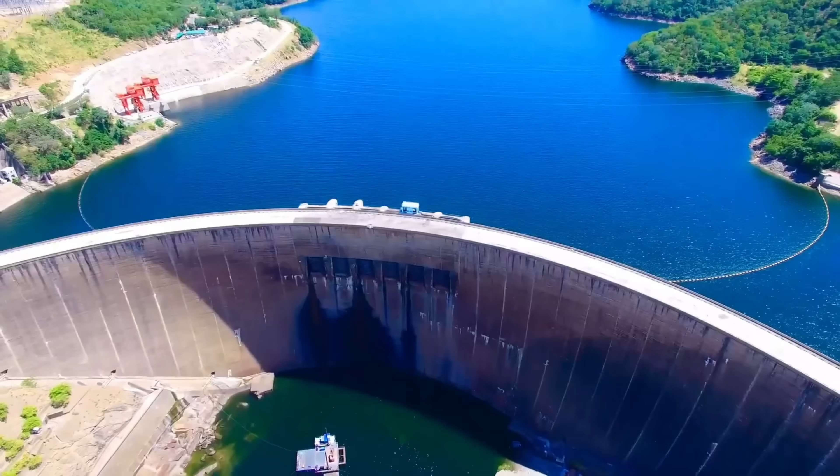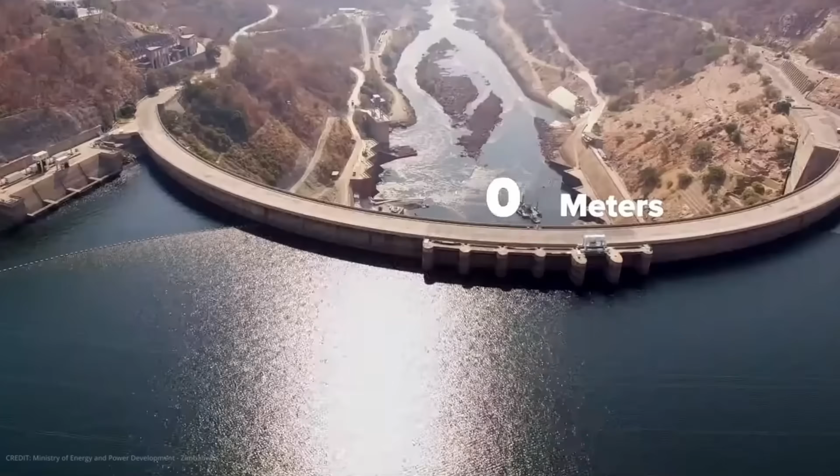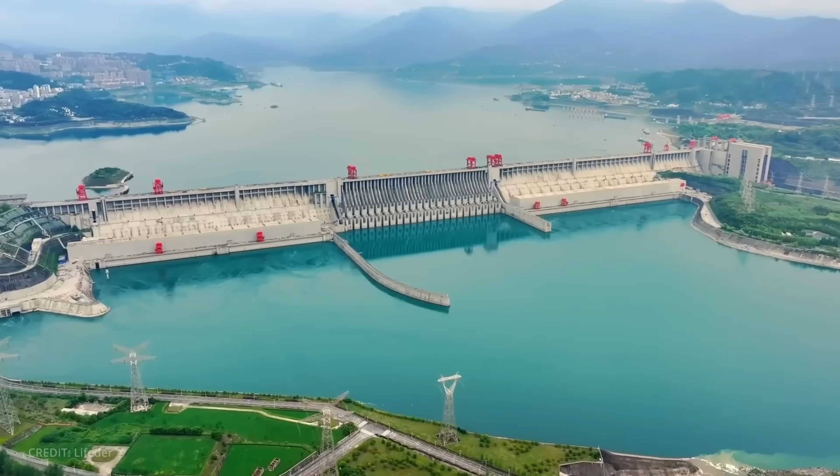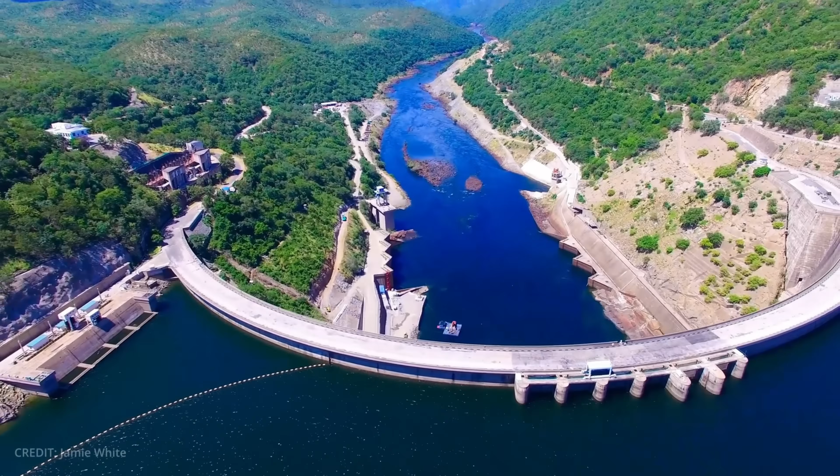For nearly 70 years, this dam has stood strong, generating electricity for 2 entire countries and powering millions of homes and industries across southern Africa. But there's a problem. Beneath the surface, concrete is cracking, foundations are eroding, and the spillway gates are literally breaking apart from the inside due to a chemical reaction destroying the structure.

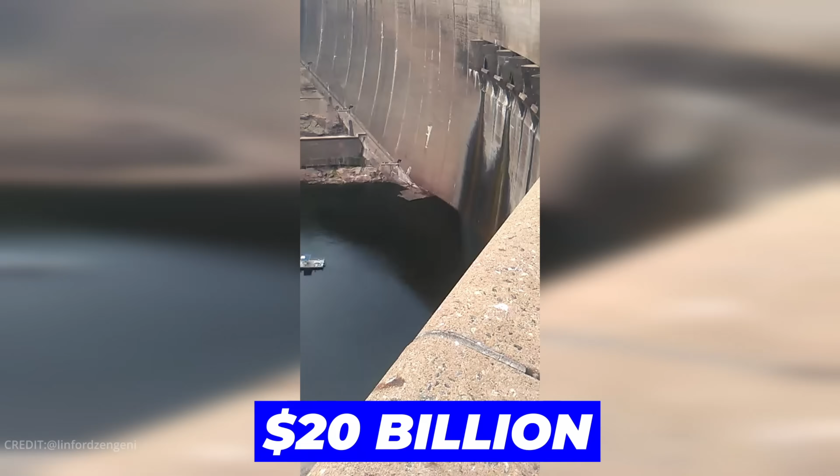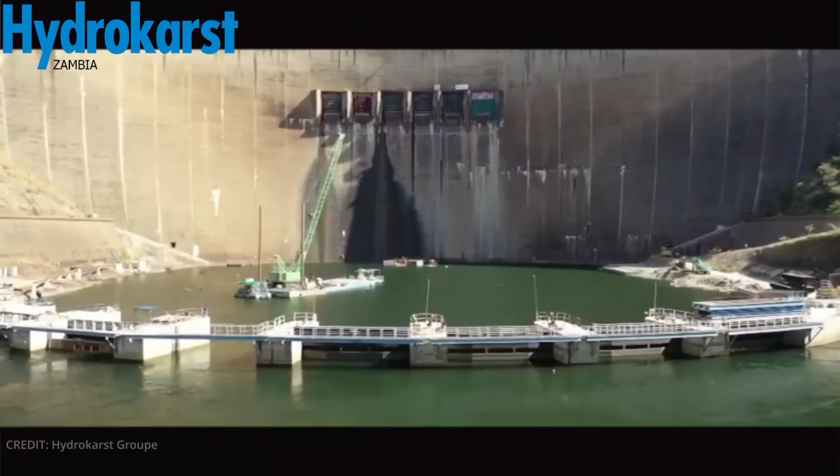Engineers warned that if this dam fails catastrophically, 3.5 million people living downstream would be in mortal danger, with economic losses exceeding $20 billion. That's why teams are now racing against time on a $294 million international rescue mission to save this aging giant. But they're facing not one crisis, but 2. This is the story of the world's largest reservoir and the desperate race to prevent a disaster that could reshape southern Africa. The clock is ticking.

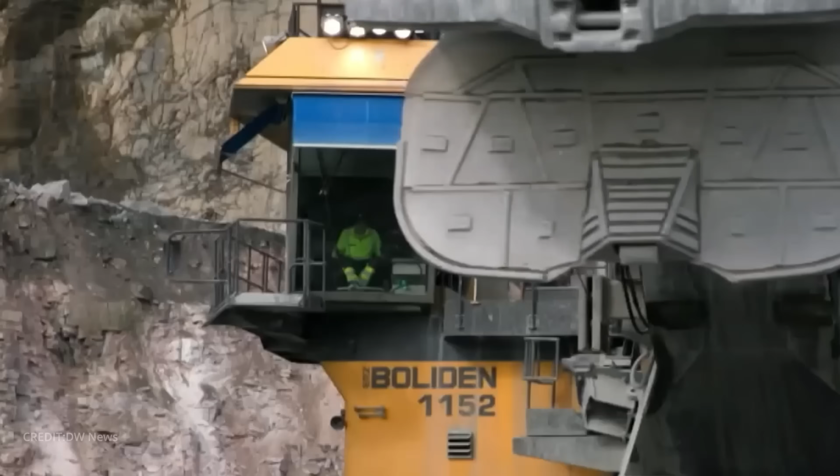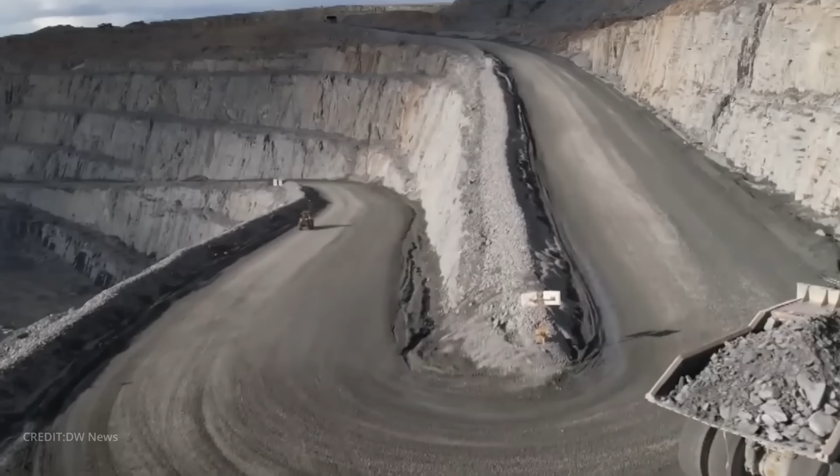To understand why this dam is so critical today, we need to go back to the 1950s. Back then, this region wasn't Zambia and Zimbabwe, it was northern and southern Rhodesia, British colonies experiencing something remarkable: a mining boom. Copper, coal, chrome. They were being pulled from the ground at an unprecedented rate, and the mining industry needed one thing above all else to keep the boom going: electricity. Lots of it. There was just one problem. There wasn't nearly enough power to meet demand.

So the colonial government made a bold decision: dam the Zambezi River at Kariba Gorge, the narrowest point along the entire river, with massive basalt rock walls on either side. The geology was perfect. An arch dam could curve into those canyon walls, using them to absorb the enormous pressure of the water behind it, rather than relying solely on the dam's own weight. It was an elegant solution.

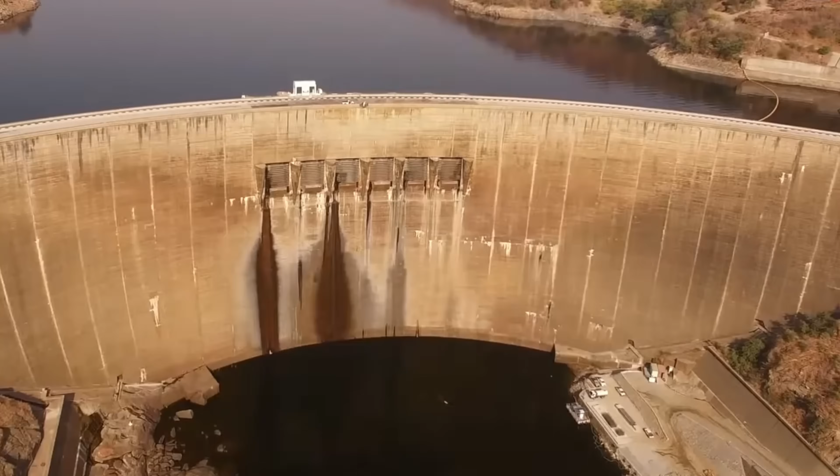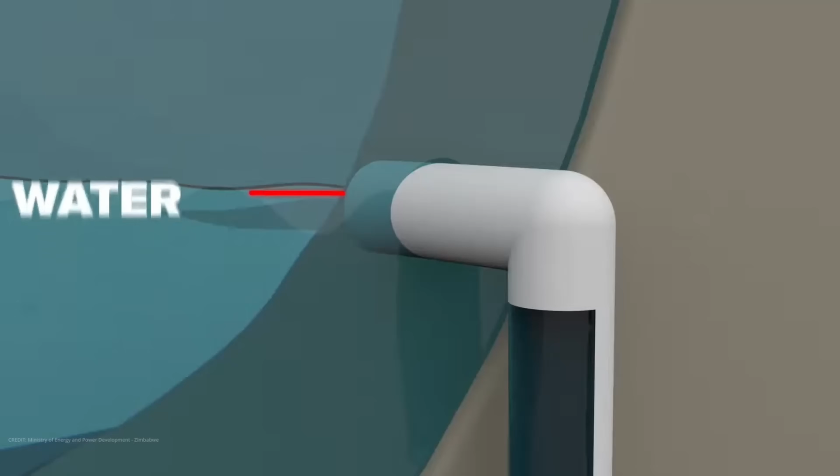But here's the thing. They didn't just want a dam. They wanted the biggest reservoir the world had ever seen. Why go so massive? Because a giant reservoir meant guaranteed power for decades, even during droughts. With 185 cubic kilometers of water behind it, this dam could generate electricity year-round, no matter what. It was insurance, a long-term bet on industrial growth. And that bet was about to require one of the most challenging construction projects Africa had ever seen.

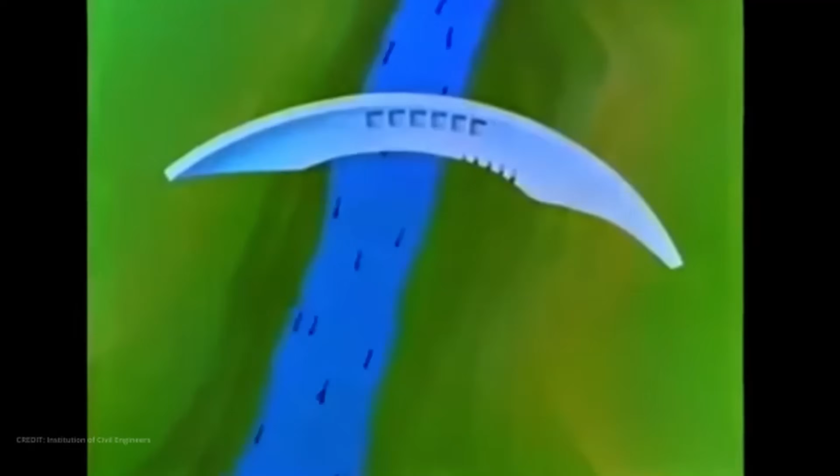Construction began in November 1955. The challenge? Build one of the world's largest dams in one of Africa's most remote locations and do it in just 4 years. The engineering team chose a double curvature concrete arch dam. At 128 meters high and 579 meters long, the structure would curve both horizontally and vertically, transferring the enormous pressure of 185 cubic kilometers of water into the canyon's solid basalt walls, rather than relying on sheer mass alone.

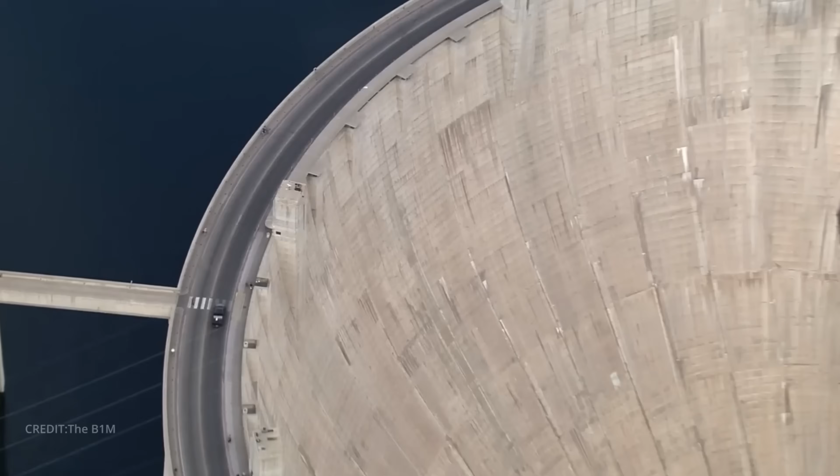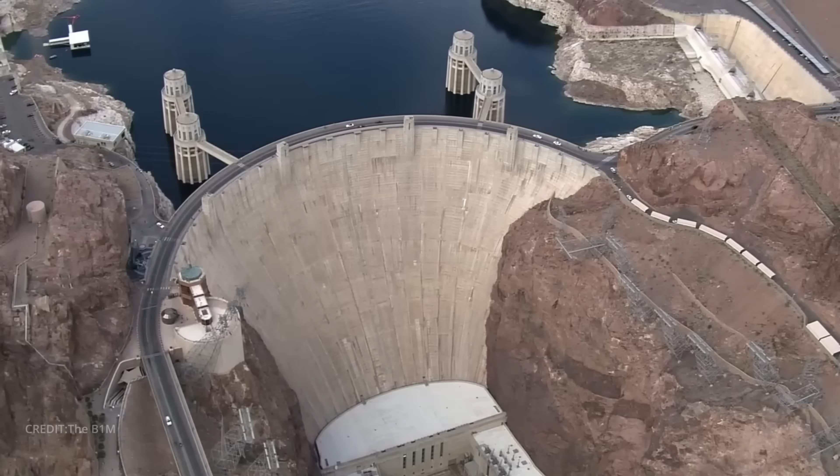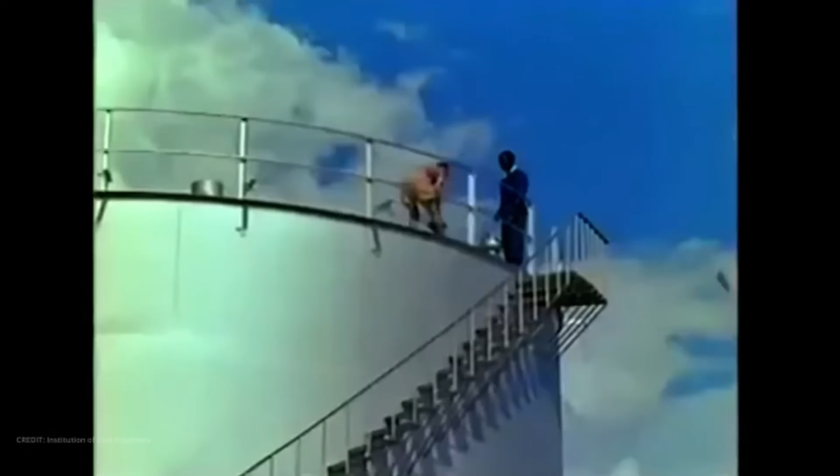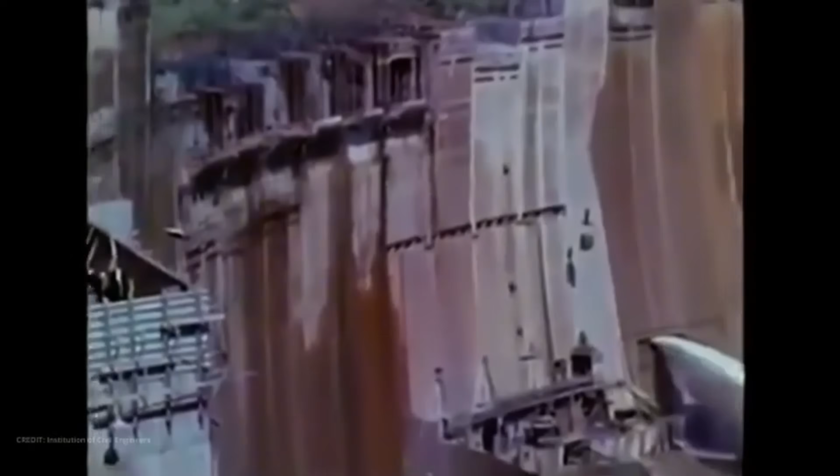The scale of the Kariba project was staggering. Roads had to be carved through rugged terrain to reach both riverbanks. An airstrip was built from scratch, essential for emergency medical evacuations and rapid transport of critical supplies, since the nearest railway was 480 kilometers away. 2 entire construction towns were erected just to house the 7,000-person workforce.

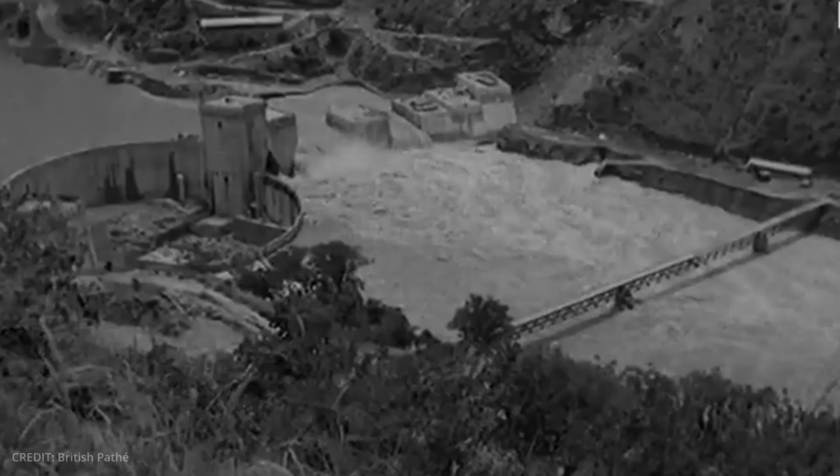But the local Tonga people believed there was another problem engineers hadn't considered. According to legend, Nyaminyami, a great river god believed to live in the rocks at the gorge, would never allow the dam to be built. In 1957, they were right, but not for the reasons they believed. The Zambezi unleashed what would later be called a 1,000-year flood, the highest flow ever recorded. Water poured over the top of the cofferdam protecting the construction area.

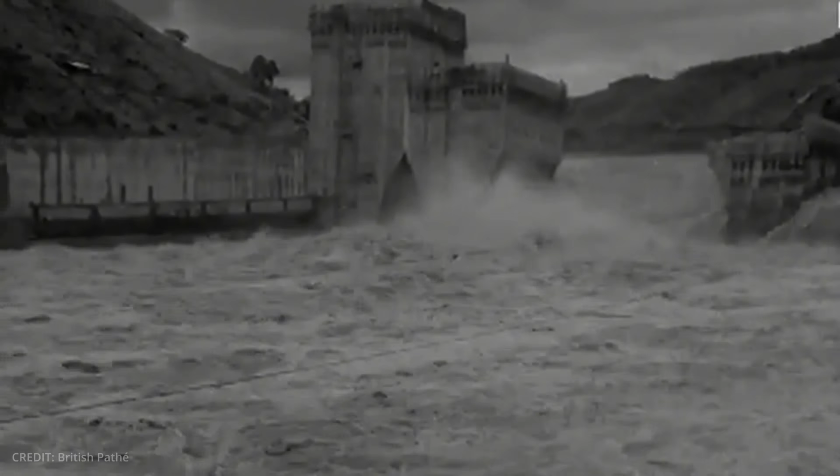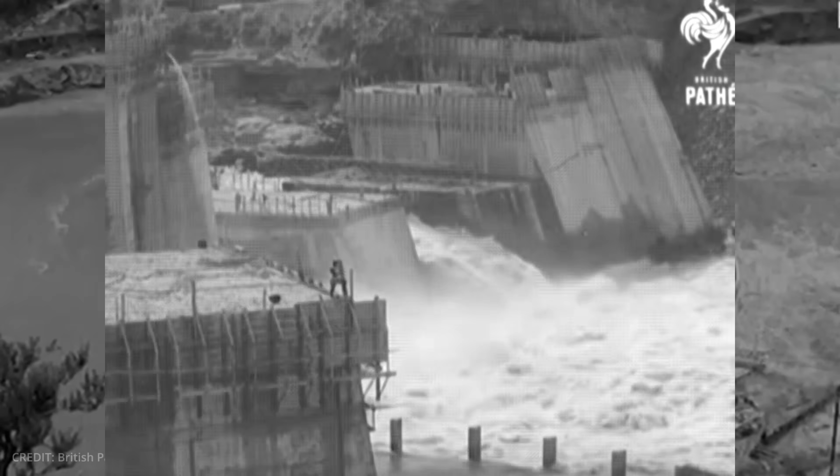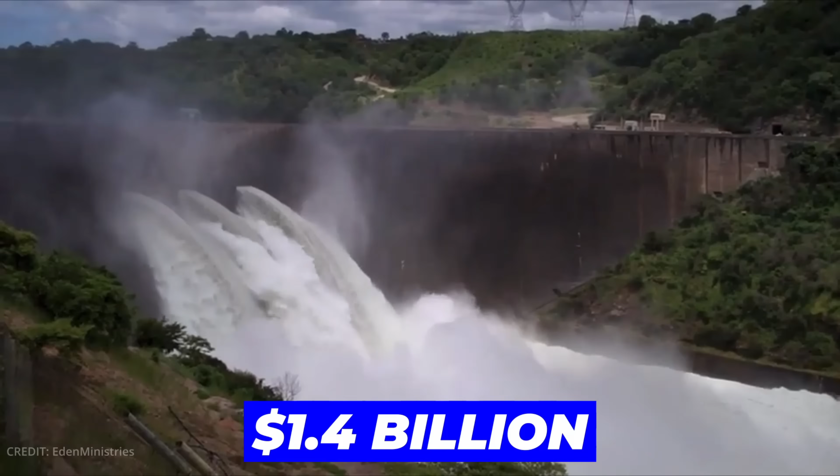By the time the dam was completed in 1959, 86 workers had died on site. Over 1 million cubic meters of concrete had been poured. The cost? $135 million in 1950s money, roughly $1.4 billion in today's dollars. There was another cost, too.

To create Lake Kariba, approximately 57,000 Tonga people had to be relocated from the Gwembe Valley, their villages and farmland disappearing beneath the rising water. Meanwhile, Operation Noah rescued about 6,000 wild animals between 1958 and 1963, a rescue that made international headlines while the human displacement went largely unnoticed.

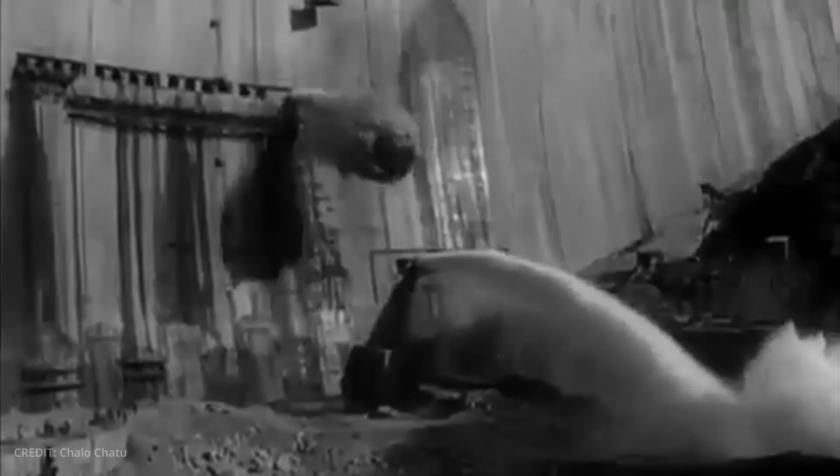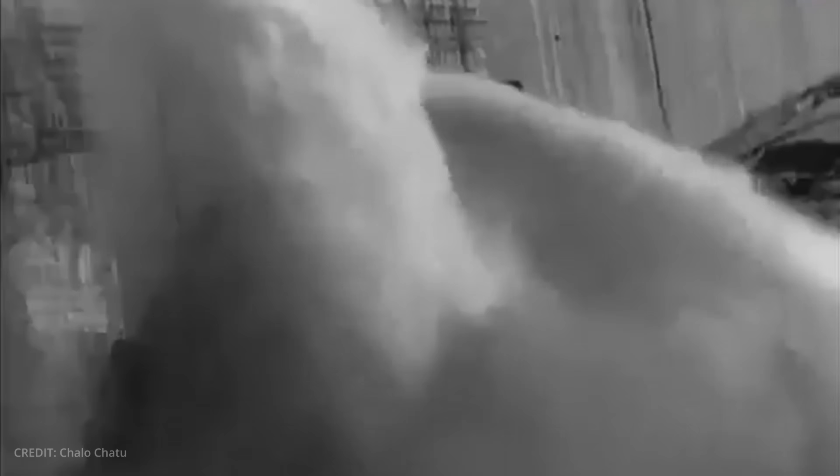When Queen Elizabeth, the Queen Mother, officially opened the dam on May 17, 1960, the structure was complete. Lake Kariba stretched 280 kilometers with a surface area of 5,580 square kilometers, making it one of the largest artificial lakes ever created. It was a triumph of mid-century engineering, a concrete arc holding back an inland sea. And for the next 6 decades, it did exactly what it was designed to do.

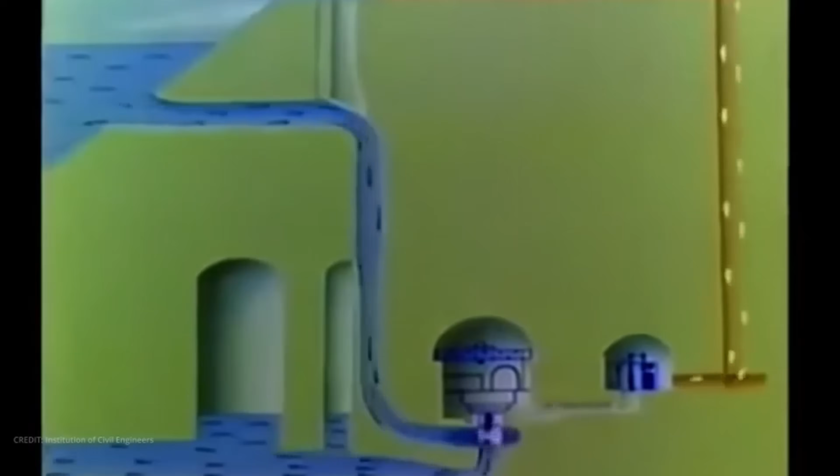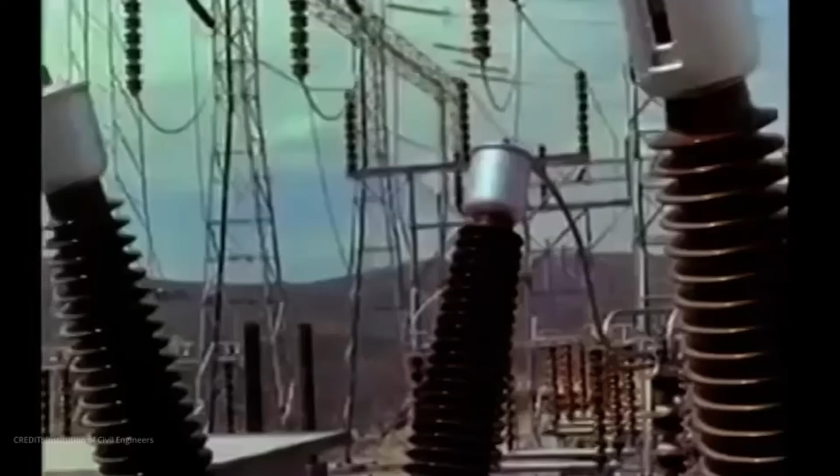The Kariba Dam generates an impressive 2,130 megawatts of electricity capacity. The power is split between 2 underground powerhouses. The North Bank station supplies around 1,080 megawatts to Zambia's copper mines and industries. The South Bank station supplies roughly 1,050 megawatts to Zimbabwe's manufacturing and agricultural sectors. These two nations have managed this shared resource without major conflict for over 60 years.

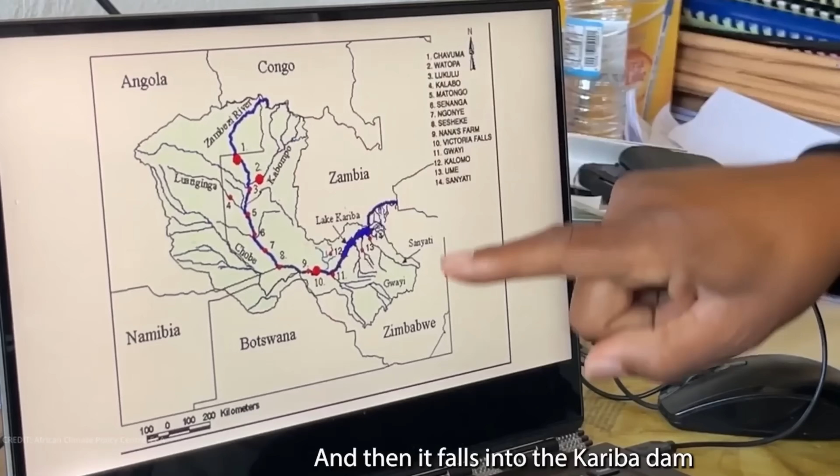The Zambezi River Authority, established in the 1960s, coordinates operations between Zambia and Zimbabwe. It's one of Africa's rare success stories in transboundary water management. At full capacity, Kariba generates over 10,000 gigawatt-hours of electricity annually, clean, renewable power that drives the entire regional economy.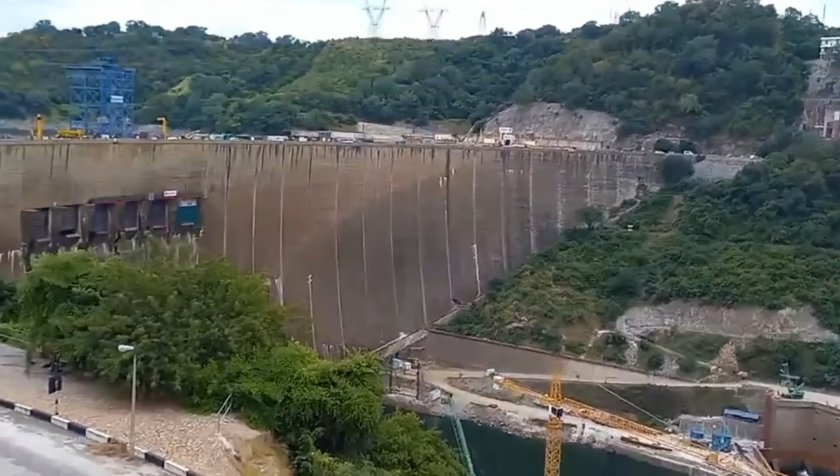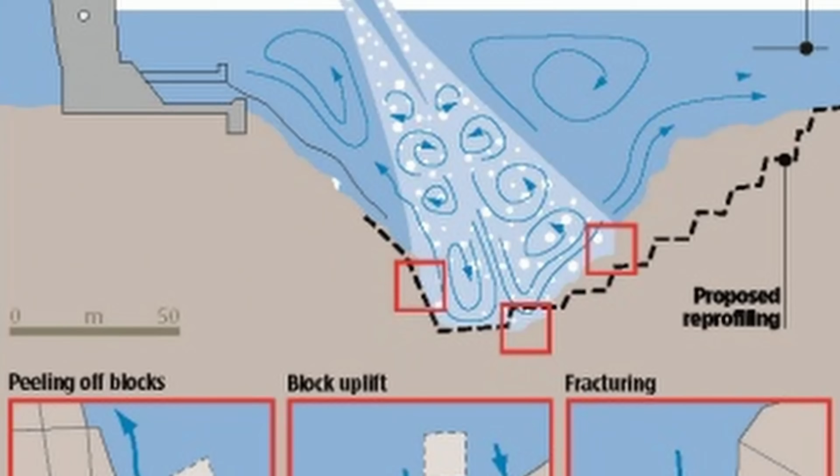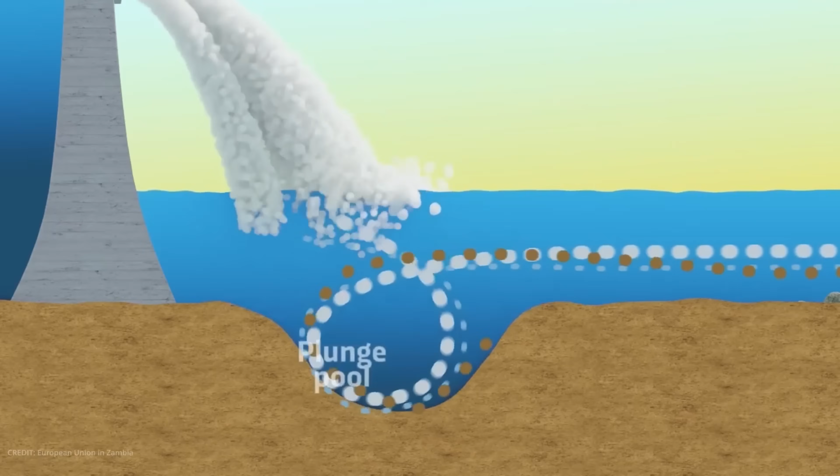But the dam's stability depends on 2 critical factors. First, the canyon walls and rock foundation must remain intact. Second, the spillway gates must function properly to release excess water during floods. Over the past 60 years, water cascading from the sluice gates at tremendous force has gradually eroded the bedrock at the base of the dam, carving out an 80-meter deep plunge pool.

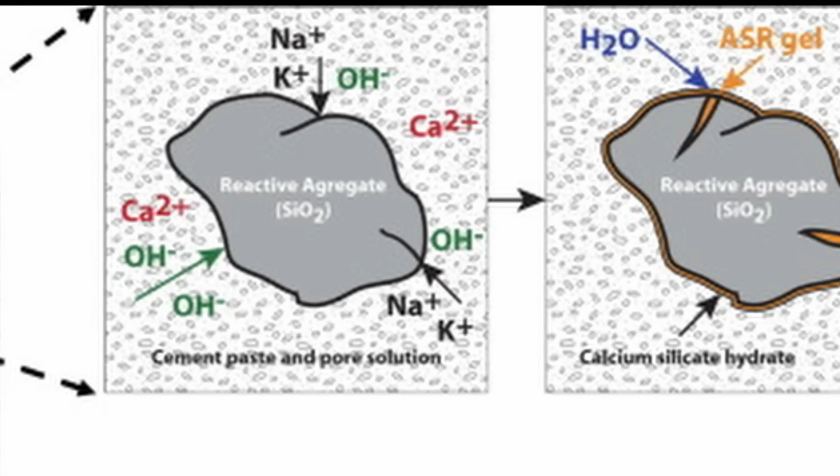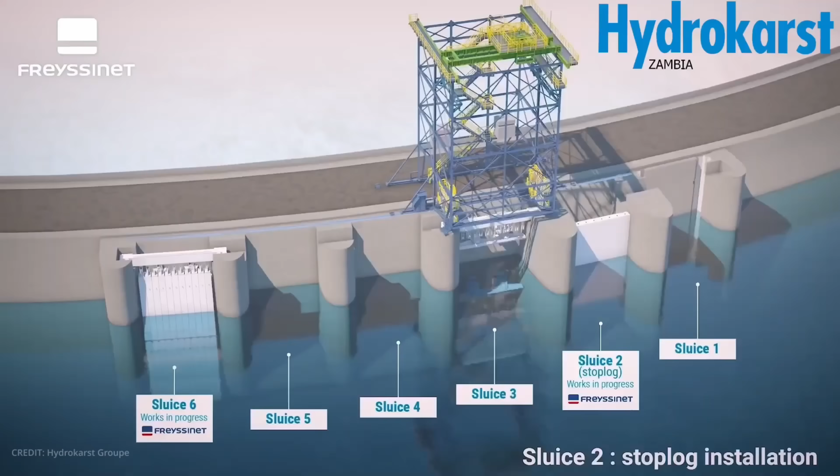Here's where it gets dangerous. That erosion has been moving upstream toward the dam's foundation. If it reaches the base of the structure, failure would be catastrophic. And that's not even the worst part. The concrete in those 6 spillway gates has been expanding due to a chemical reaction called alkali-silica reaction, the same process destroying the dam's structural integrity. Over 60 years, this has warped the gates, making it harder for them to open and close properly.

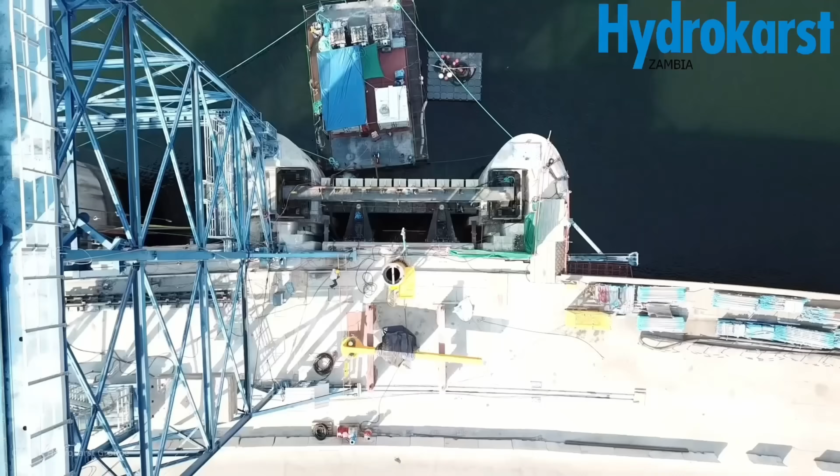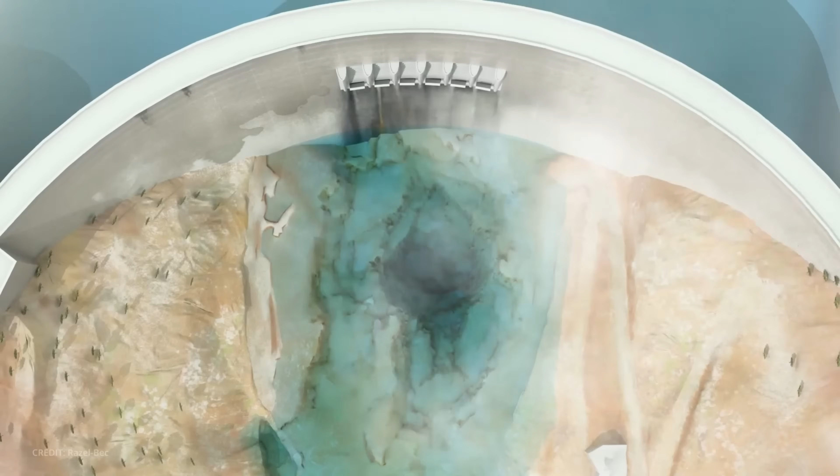If those gates jam in the closed position during a monsoon flood, water could overtop the dam entirely. Combined with a weakened foundation, that scenario would be the dam's death sentence. These are exactly the problems engineers are racing to fix. Kariba Dam isn't just facing one problem, it's facing 2 massive crises simultaneously, and they're feeding off each other. Crisis 1: concrete breaking from the inside.

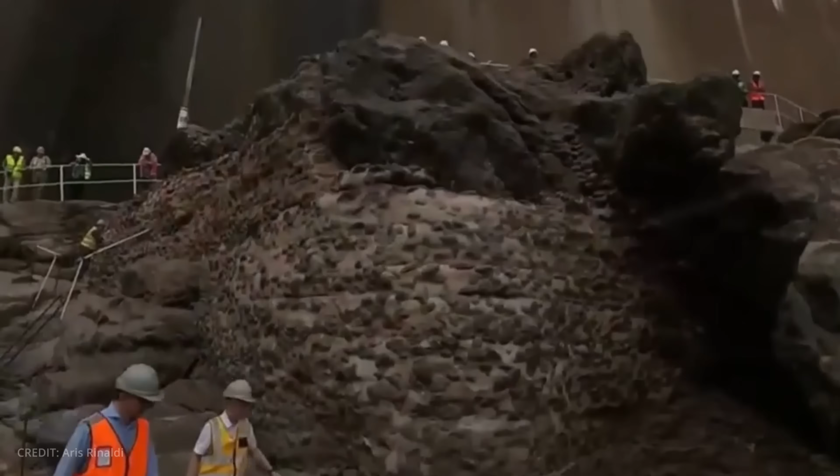In the 1990s, engineers discovered something alarming during inspections. The concrete in the spillway gates was literally cracking and warping due to alkali-silica reaction. This chemical process causes reactive minerals inside the concrete to expand over decades, creating internal stress. The problem? Those 6 spillway gates are the only mechanism for controlling water levels.

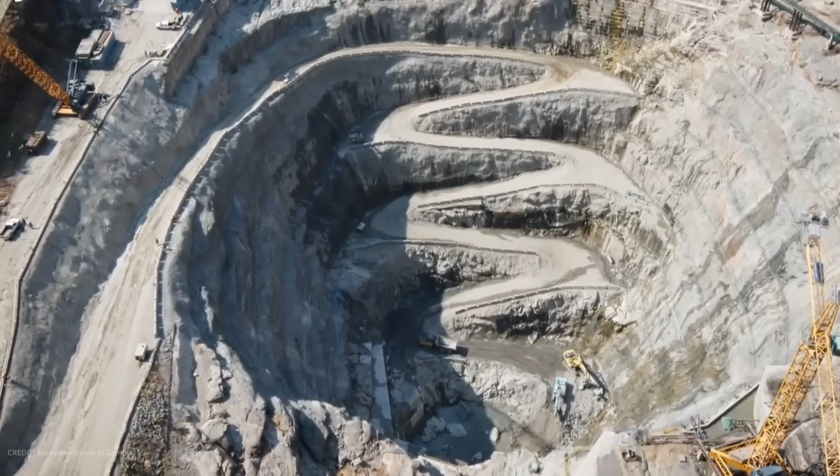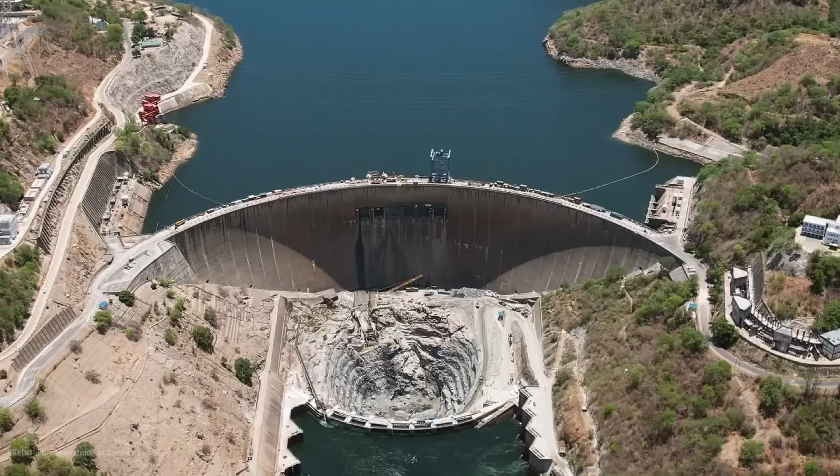If they fail to open during a monsoon flood, water can't escape. If they jam in the closed position, water backs up behind the dam and eventually overtops the wall. Either way, it's catastrophic. There's also the matter of foundation stability. That 80-meter erosion we mentioned?

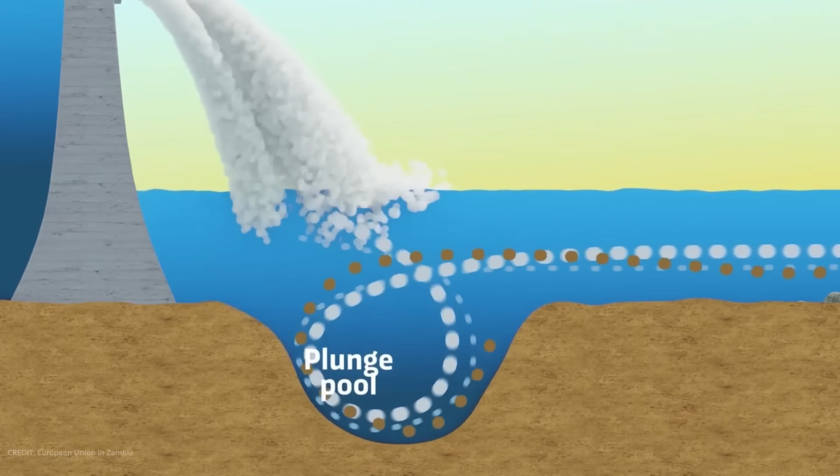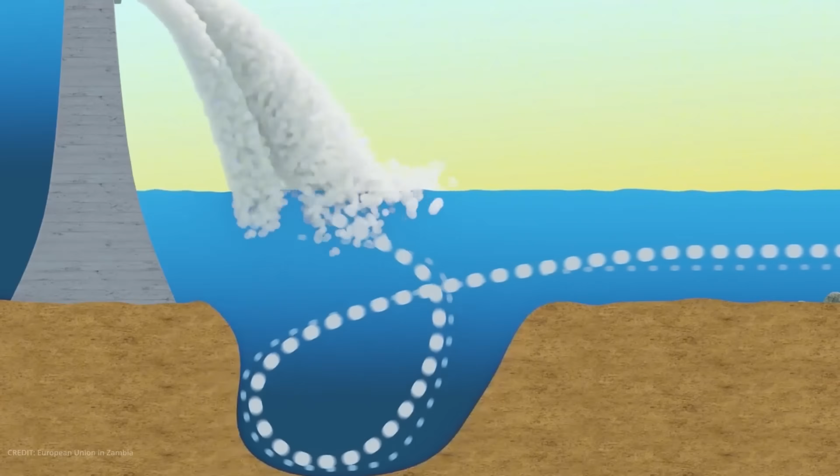It's been creating weak points in the bedrock directly beneath the dam. If that erosion continues, it could undermine the dam's ability to transfer water pressure into the canyon walls, the entire principle that keeps an arched dam upright. The dam engineers were clear. These aren't problems you can patch. They're structural failures that demand urgent intervention.

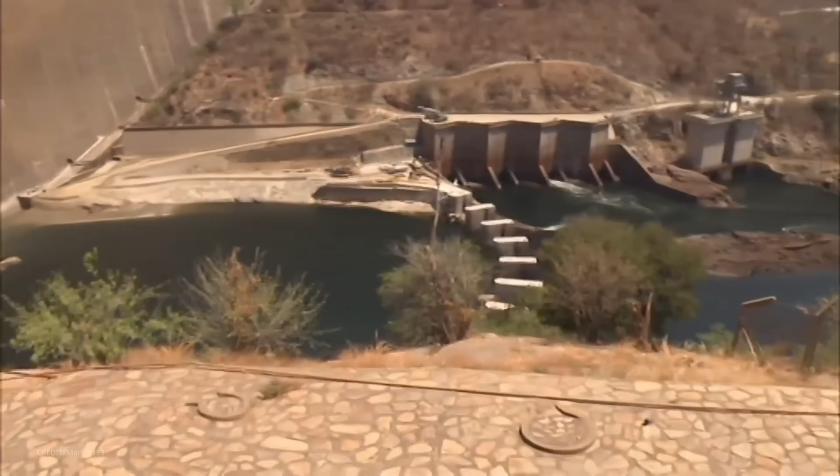Crisis 2. The drought that makes everything worse. In 2024, Southern Africa was hit by a severe drought, one of the worst in 40 years. Lake Kariba's water levels plummeted to just 10% of usable capacity. Zimbabwe had to shut down its entire power station at Kariba South. Industries stalled, hospitals lost power. Millions went without electricity for days at a time.

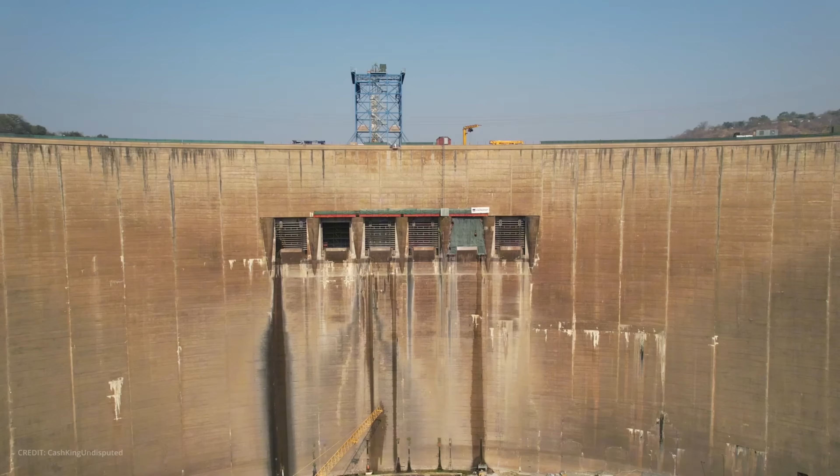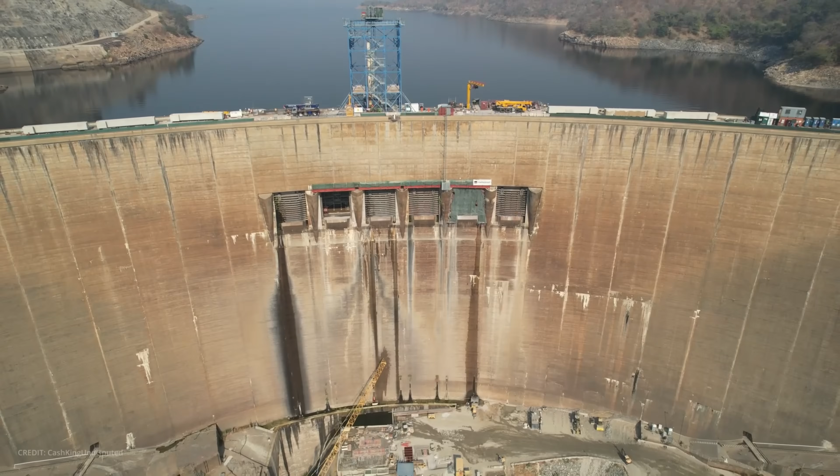But the drought created a vicious cycle. The Kariba Dam Rehabilitation Project is partly funded by electricity revenue. When water levels drop, power generation drops. When power generation drops, the money to fix the dam disappears. So you have a dam with critical structural failures, but its own power output is too low to fund the repairs.

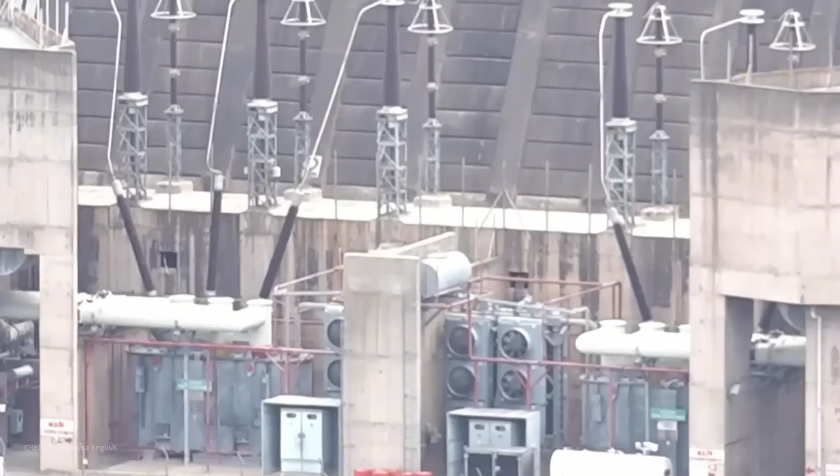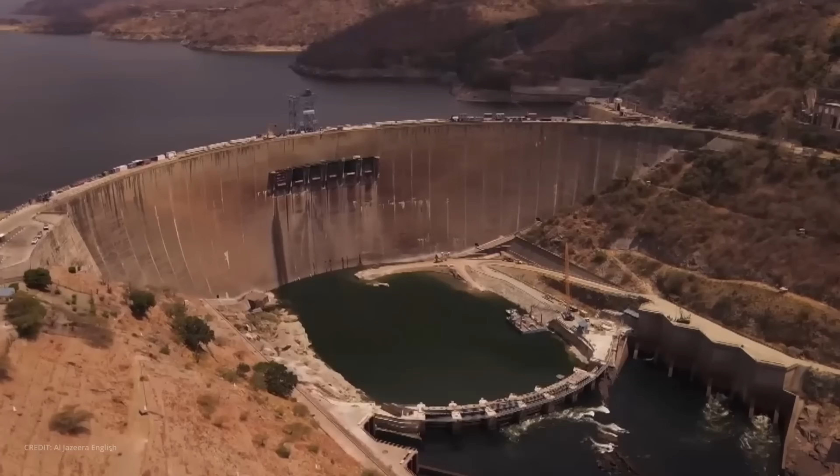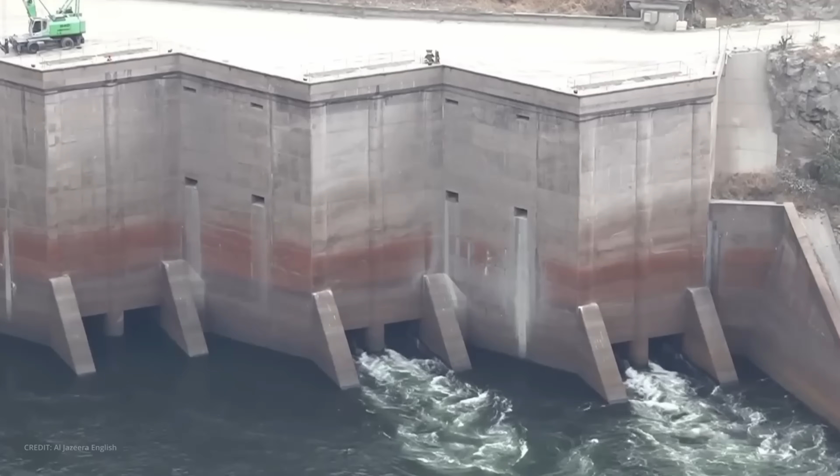Why not build a new dam? Here's the question everyone asks. Why not just build a replacement? The answer is scale. You can't drain 185 cubic kilometers of water without destroying 2 entire national economies. There's no alternative power source while construction happens. And unlike Switzerland's dam project, where they could build in front and drain the space between, Kariba has to stay operational the entire time it's being repaired. So instead, engineers are doing something unprecedented, saving an aging giant from the inside out while racing against time and drought. The window is closing.

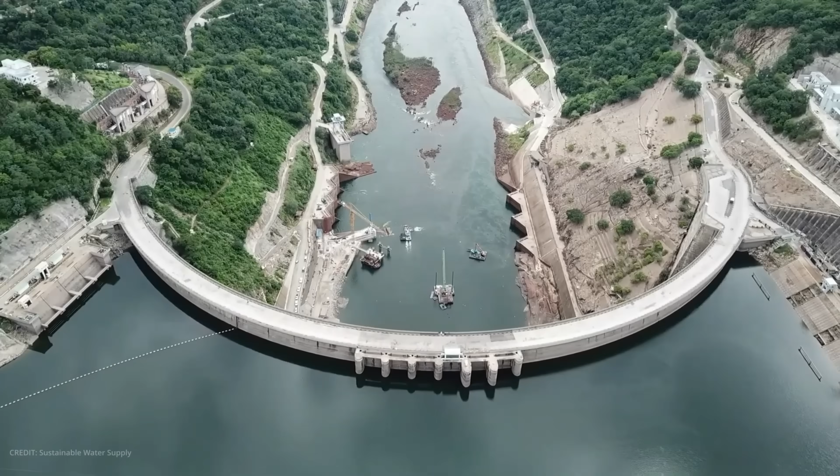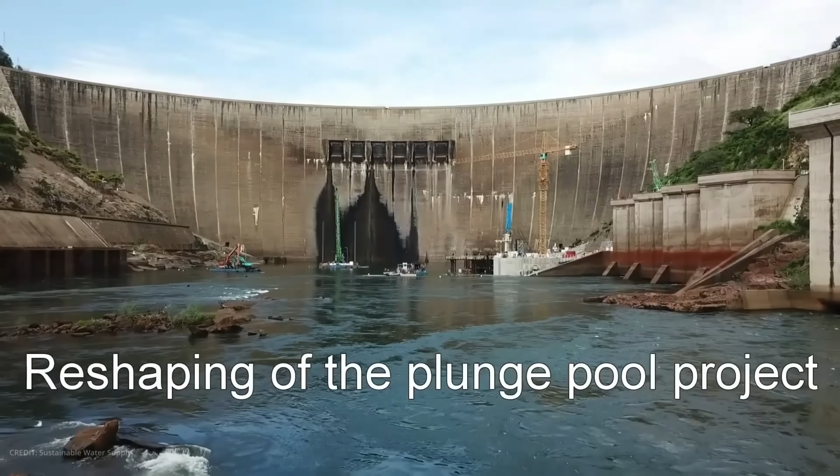So, how do you save a dam that can't be stopped? In 2017, international partners launched the Kariba Dam Rehabilitation Project, a $294 million operation funded by the European Union, the World Bank, the African Development Bank, and Sweden. It was supposed to finish by February 2025. Instead, it's now scheduled to wrap up by December 31st, 2026. Why the delay? Because the problems turned out to be far more complex than initial inspections suggested.

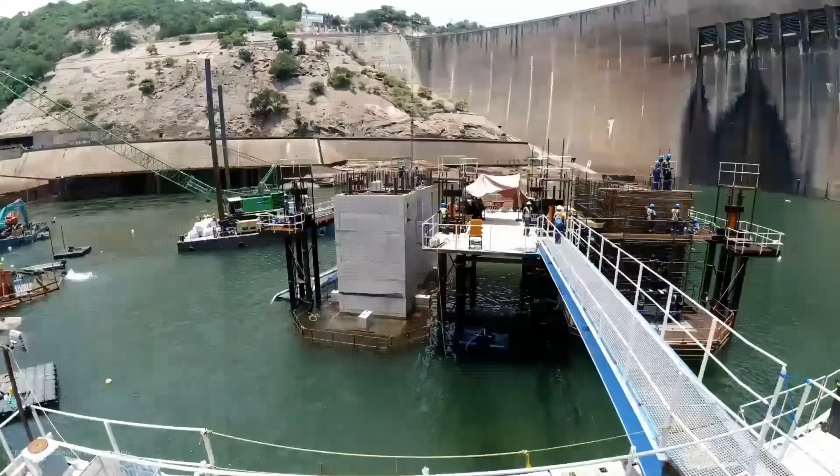The work is happening in 2 main phases. Phase 1 tackled the plunge pool erosion. Engineers built a massive cofferdam to isolate the area, then excavated and reinforced the damaged bedrock with 5,241 cubic meters of concrete. This component was completed in July 2024, with the cofferdam removed by October. It was a critical milestone, stabilizing the dam's foundation before further damage could occur.

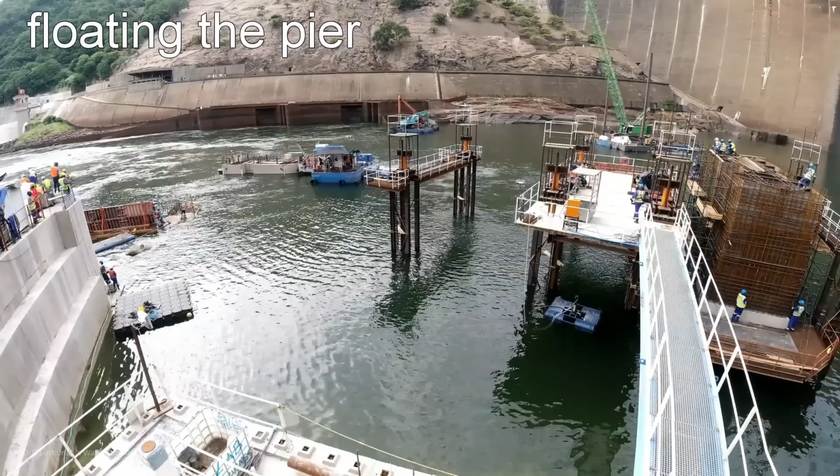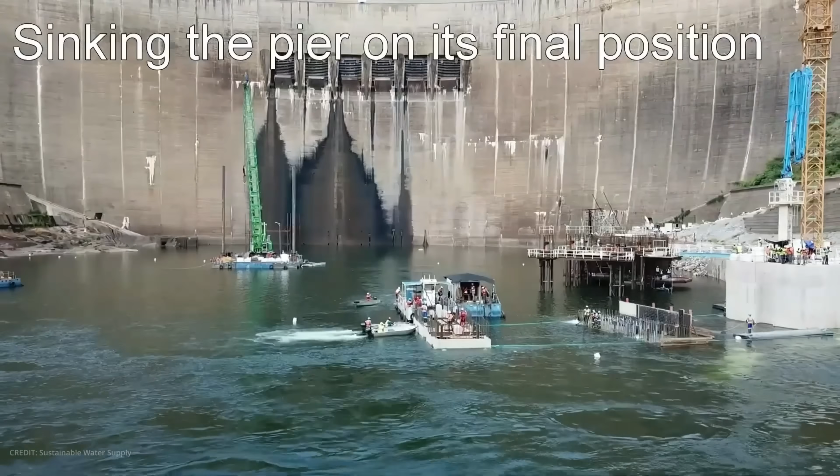Phase 2 is the spillway refurbishment. This is the real engineering challenge. 6 sluice gates, each deteriorated by decades of corrosive water and concrete degradation, need to be replaced with chemically resistant alternatives. As of October 2024, the work is 82% complete on 4 gates. The remaining 2 are on the critical path. One delay cascades the entire timeline.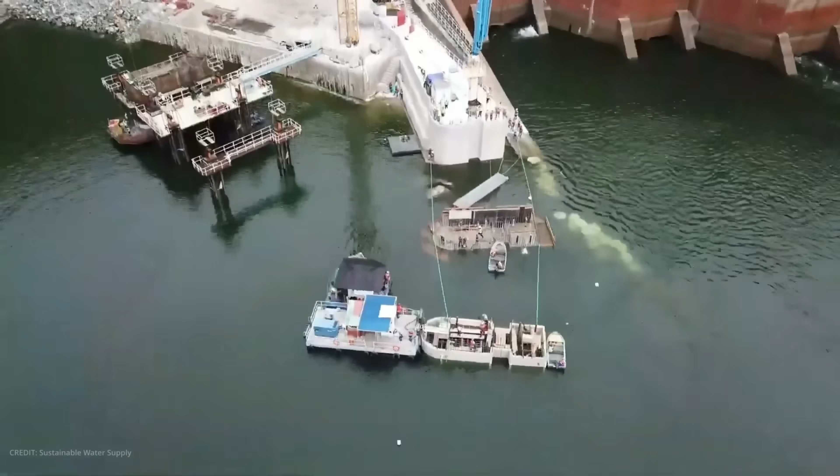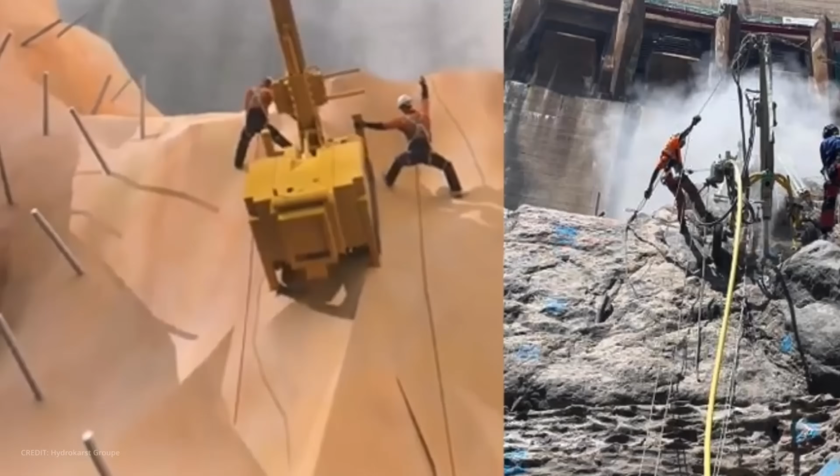All this work is happening on a functioning, power-generating dam. Engineers can only operate during the dry season when water levels are low enough to access the structures. They cannot shut it down. Low water means less power generation. Less power generation means lower revenue. Lower revenue means less money to fund the repairs. It's a race against physics, drought, and the calendar.

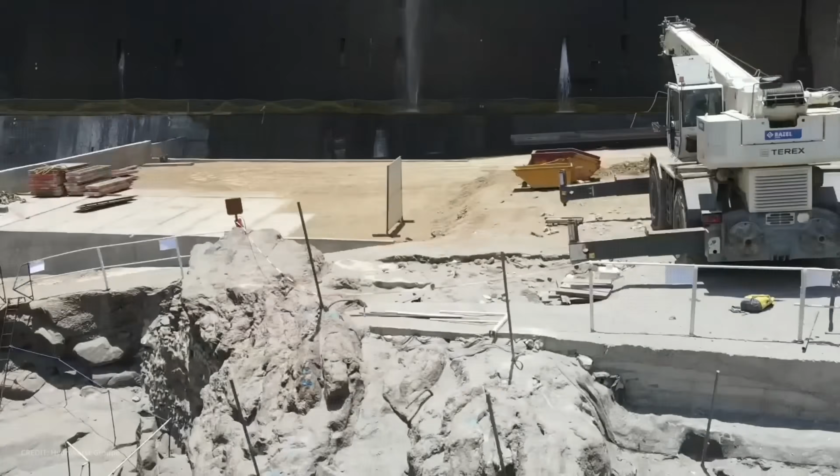Yet somehow, Zambia and Zimbabwe have managed to keep this project moving forward together, coordinating through the Zambezi River Authority, sharing the costs, agreeing on priorities. It's not perfect, but it's working. And it has to. In less than 2 years, the dam's future will either be secured or it won't be a dam.

If we zoom out, Kariba isn't just about one dam. It's a preview of what's coming across Africa. Over 200 large dams dot the continent, most built during the colonial era or between the 1950s and 1980s. Today, they're all aging at the same time, facing droughts and extreme weather their designers never imagined. The Kariba rehabilitation is a test case. If it succeeds, it shows how African nations can manage their aging mega-infrastructure. If it fails, the consequences ripple across the region.

But it's also a warning. The $294 million bill for Kariba reflects decades of deferred maintenance, colonial-era infrastructure handed to newly independent nations without resources to maintain it. Across Africa and the developing world, hundreds of dams and power systems built in the mid-20th century are reaching the end of their design lives. Kariba isn't just one dam's fight for survival. It's a race against time for an entire generation of aging infrastructure.